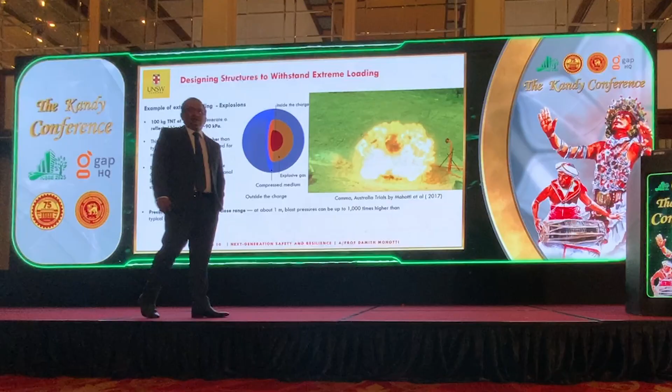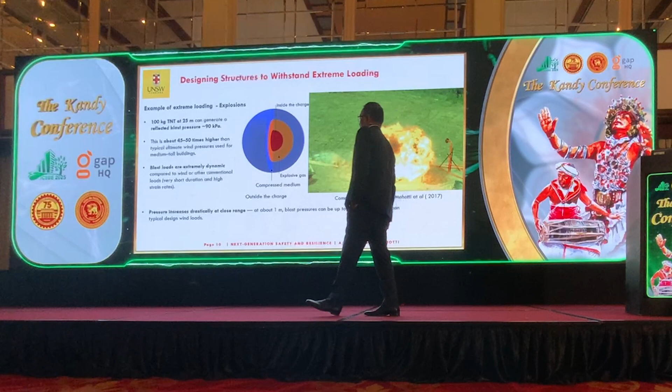If you're familiar with wind loading, for a tall to medium rise building, even at ultimate limit state, you will get roughly 2 to 2.5 kPa pressure. So you can see magnitude-wise, blast load at that far field distance is 45 to 50 times more.

The closer you get to the explosive device, the greater the threat—it can be 1,000 times more than normal wind. But there's a big difference as well: wind is relatively slow moving, while blast is relatively dynamic in comparison. A blast event happens within milliseconds, whereas wind acts over several seconds.

So this dynamic difference is there, but the message I wanted to highlight is that what we adopted in our simple design practice for wind and other loads does not work with blast or blast-type loads. That's why we need to keep an eye on this area and develop knowledge within our engineering community, making sure they understand the importance of these things, and bring that knowledge from the defense space into our normal practice.

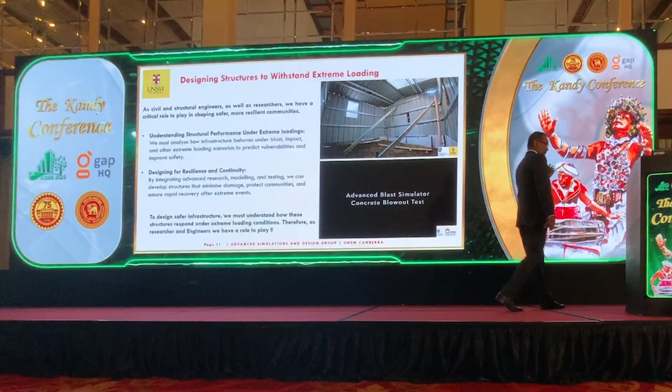This is what we do regularly. We like to do these things, enjoy the sound—that's why I kept the soundtrack as well. The top one is a hydrogen explosion, which I will explain as an example. The second one is the National Blast Facility, which I'm currently leading, showing its capability.

So what I'm highlighting here is when we are thinking about structural design for these natural disasters or extreme loading, we need to have a thorough understanding of how these structures behave under that extreme load. If you are aware of this, you can tackle these problems.

I'll bring this now to two examples I like to highlight, to show the innovations and capabilities developed countries are taking in this space at the moment. By giving these examples, we can understand where we should move as a nation and develop our capabilities for our future.

The first one I'd like to highlight is the facility I'm building up at the moment. I'm leading this one, it's $2 million Australian dollars worth of funding to build the National Advanced Blast Simulator for Australia. What does it mean?

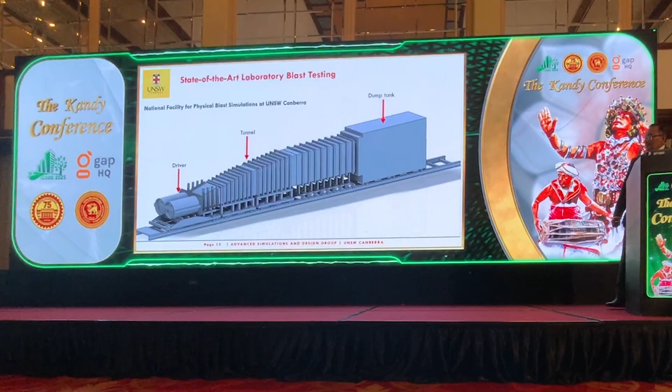But we value this one because having such an instrument in a laboratory environment presents many challenges. I'll explain briefly how it works so you can actually understand. It consists of three components.

Driver section, where the gas explosion happens - this instrument operates through gas explosion. It occurs here at the driver, propagates through the tunnel section, and we have our structural element closer to the dump tank so that we can test them on a regular basis.

It's similar to a wind tunnel, if you're familiar with wind tunnels, but stronger than a wind tunnel because pressures are developed to a higher magnitude than in a wind tunnel.

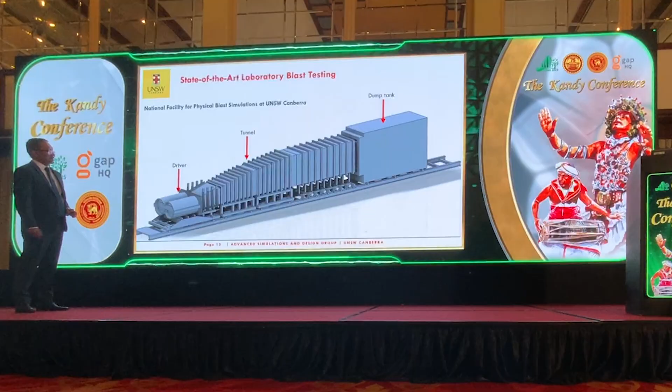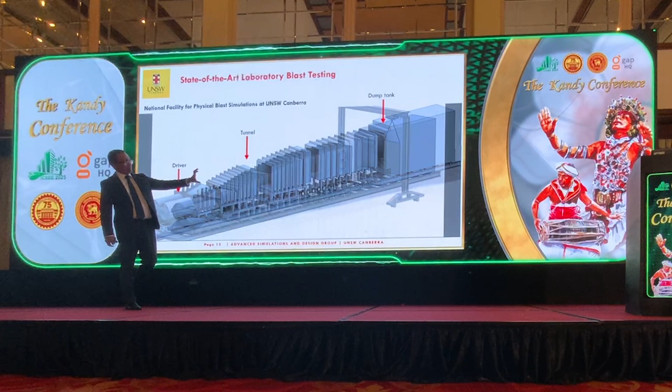So I'd like to take you back to that. The setup has been created in a modular formation - you can easily transport and re-establish it. The tunnel part is made out of 4 parts.

You generally fix steel or concrete samples to test, and the pressure wave generated in the driver will propagate through the tunnel. When it reaches the location of the testing sample, it has almost become a planar wave - meaning a flat wave - so it applies that load throughout the system. That's the beauty of this setup.

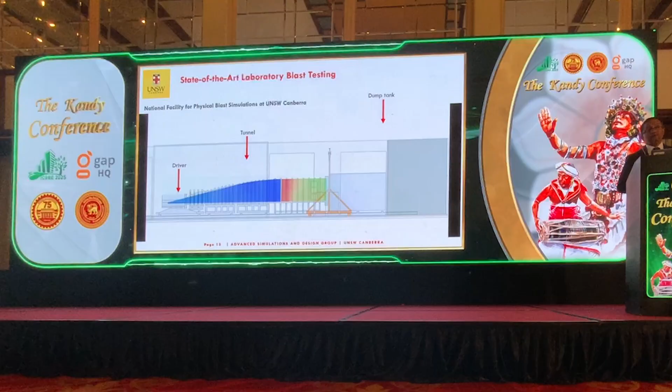Initially designed in USA and transported to Australia for establishment. I will show you two videos in real time. So this is the sample - generally it sits inside this part.

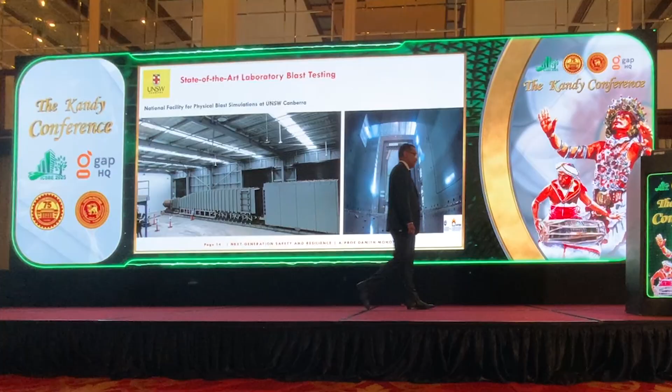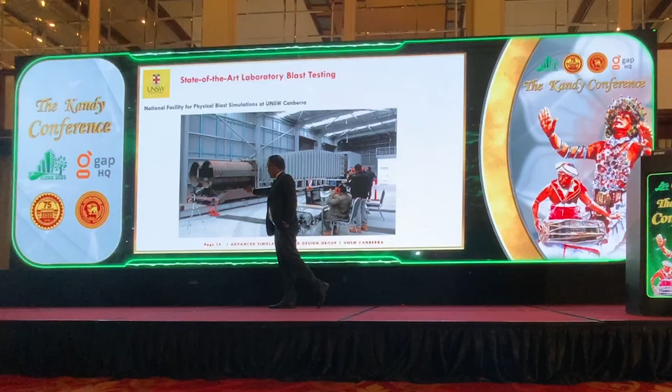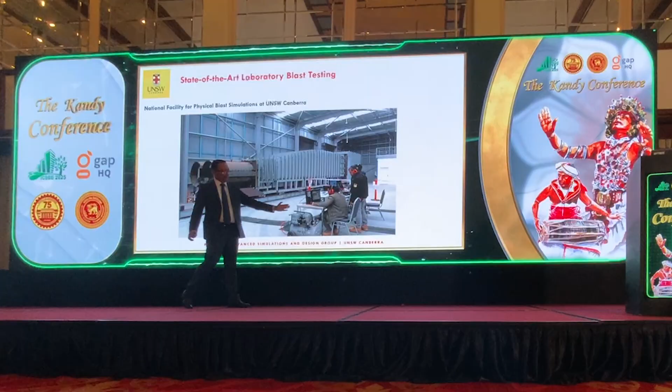So all my team is working here at this moment. You can see the distance between them and the instrument is just a few meters. Can you do this in real blast trials? No. But the advantage of this setup is we are working within a few meters with all the safety approvals, and we can handle the instrument nicely within that distance.

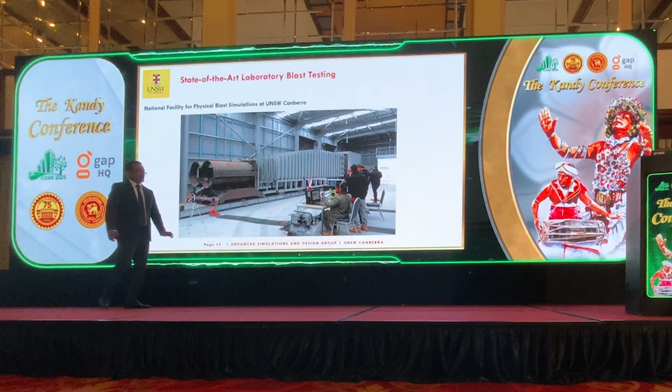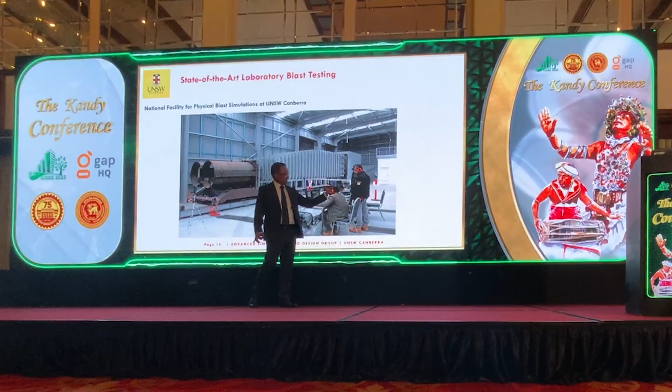And there are many state-of-the-art equipment working here. It's not just one thing - this is a big instrument, but what's happening is the most interesting part. One feeds into our academic research: data loggers, high-speed cameras, and all other sophisticated equipment here.

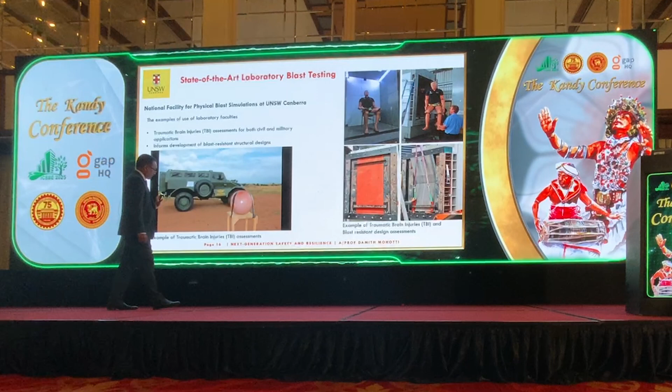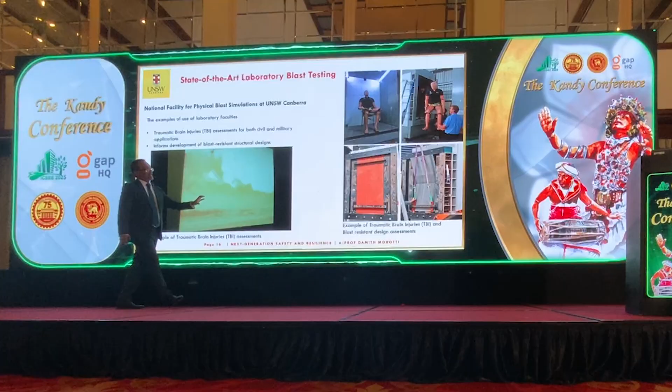So we can test - the interesting part of this instrument is it can test especially traumatic brain injuries, TBIs as we generally call them, because this is the main problem for our defense people or even civilians in a blast situation. So we can easily put dummy models and test them. There's a clear interest in that area.

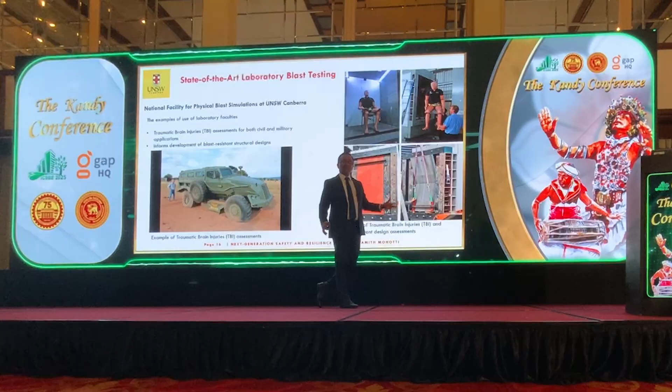These capabilities are not there or easy to achieve in field trials. It's costly as well as time-consuming.

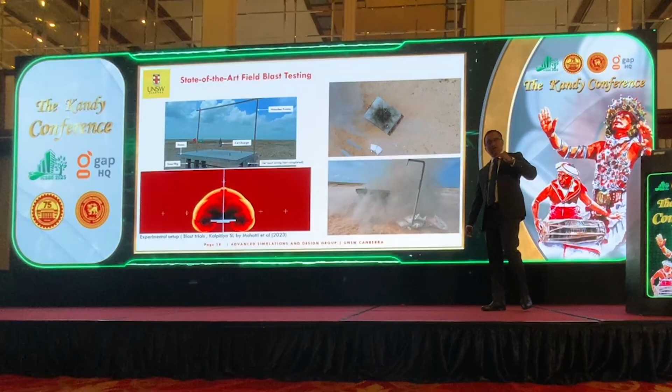In addition to that, we are doing state-of-the-art blast testing, field trials as well. This is one example where we tested concrete slabs commonly used in Australian buildings, especially medium-rise buildings with low-level floors. We want a shallow beam plus relatively small thickness slab to maintain that clearance, so we want to observe the capability of those regularly used slab systems under possible close-in detonation.

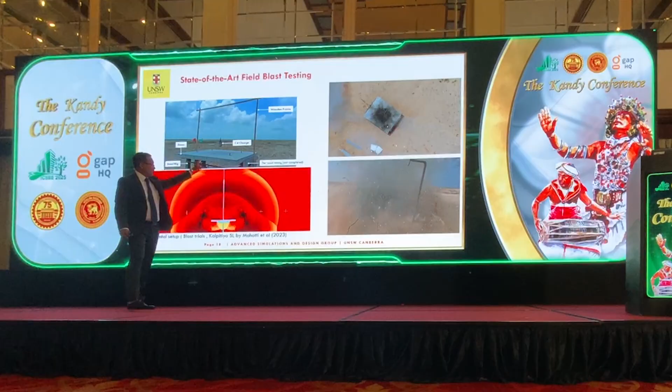That's what we did - we went with C4 charges. If you're familiar, there are many chemical explosives used in the business: C4, TNT, and some others are the commonly used ones. So we put up to 10 kilograms of C4 here, created the explosion, and reported on it at academic level for our population.

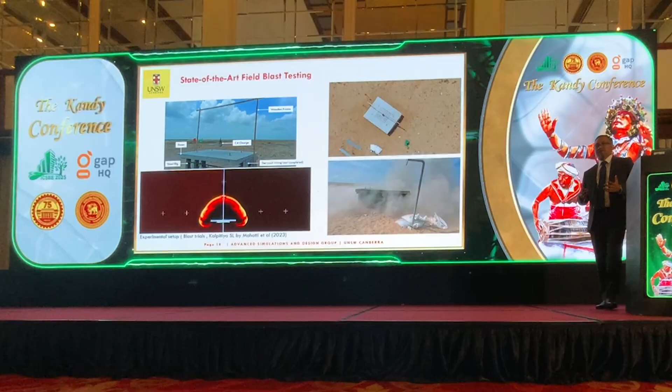So this is what I'm saying - this is the level required if we are to become a resilient country against these extreme threats. Threats can be both natural as well as man-made.

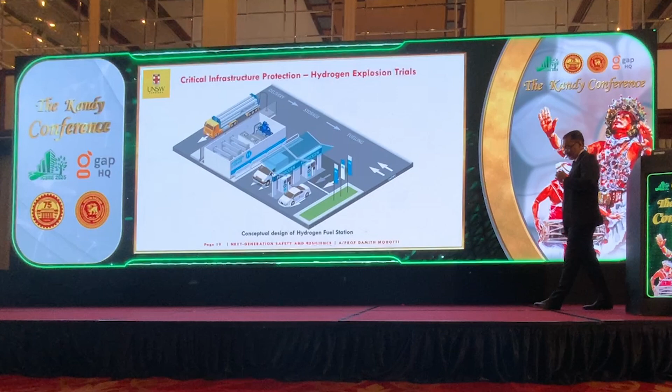Before I finish, I'd like to highlight this new area we are taking. It's not a new area for us, but there's a clear interest in the community on finding alternative fuel.

We all know most researchers are working on making hydrogen or green hydrogen, but my interest is different. My effort is to protect people against possible explosions that can result from adopting hydrogen as fuel in future. Why? Hydrogen has low ignition energy, low flammability limit, rapid reaction ability, and low density, among other characteristics that make it ignite very quickly. So it's a very dangerous, flammable material.

There are many incidents reported all over the world with hydrogen gas leaks, and this is one part of the hydrogen industry that we expect in a few years. So our infrastructure should be ready by the time hydrogen is introduced. Our engineers should be ready to understand this threat so that we can mitigate possible threats in the future. This is a very innovative area.

The US is funding billions into this sector. Australia, same again. So we need to understand the threats that can come.

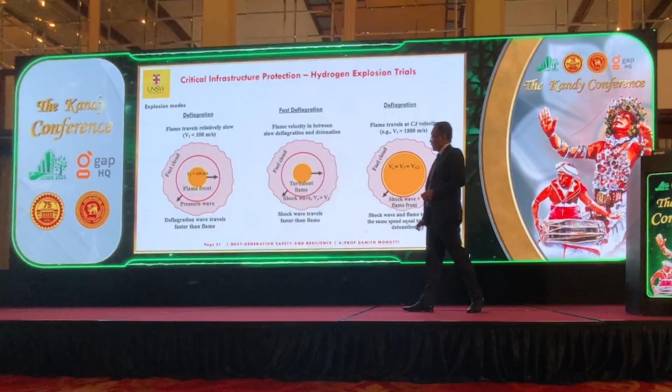Just to summarize, I won't go into very technical details today because it's a keynote, but I want to highlight that hydrogen can create explosions in three ways. What we call deflagration, mainly where fire dominates this phase. Fire is the dominant force there. The third one is detonation generally.

Detonation - I think there's a spelling mistake there. It should be detonation, not deflagration.

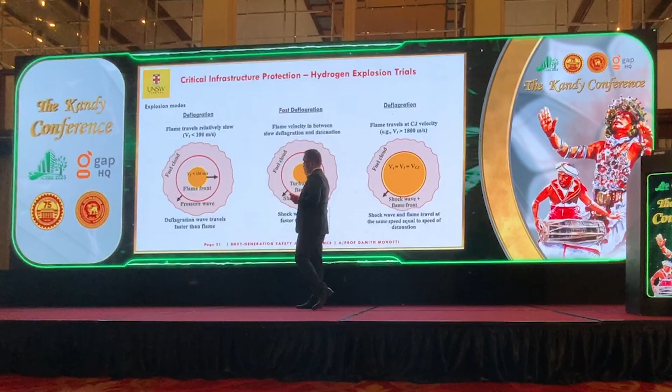The third one, we have the shock wave - it's related to shock wave velocity. Detonation is very similar to a normal explosion. In between that, we have something called fast deflagration. I know you won't get the full message right now, but next time we'll give you some understanding.

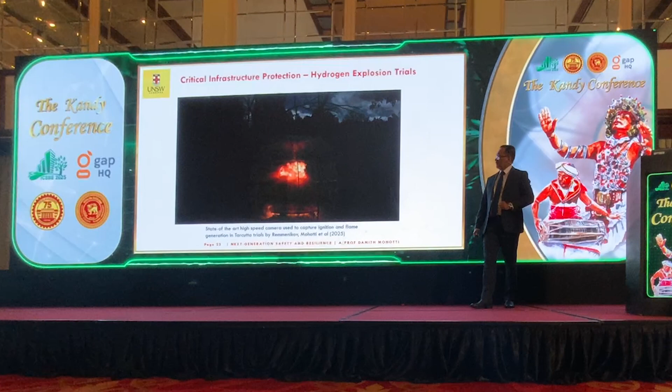This one is almost like fast deflagration, mixed with deflagration and detonation. But the next one is the most interesting - this is like a real blast scenario. This was captured using state-of-the-art high-speed cameras at a very high frame rate, which is why you can see these visuals.

If you carefully look at this one, you can see the shock wave gradually moving through the air.

So what is the message to take away from this discussion? There are many areas of national priority for civil and structural engineers beyond traditional research. This is my continuous message to you - even when I met students from Moratuwa a few days ago, I passed the same message. We need to think beyond traditional research.